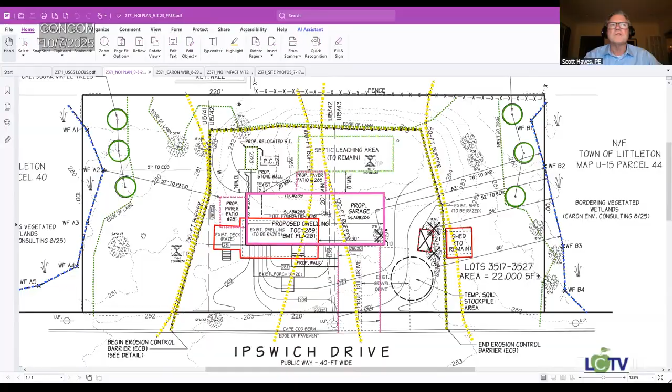So when we went out and did the survey, we picked up the edge of the lawn, and all the large overstory trees within the yard area have been identified. And we did our best to preserve as many of those as we could. Got a septic system up here, kind of in the middle between the two buffer zone areas, and the lawn kind of falls around here, and then down through here. It's the existing lawn, and then there's a lightly wooded non-lawn area between the edge of the BVW and the edge of the lawn. One of these trees over here on this side as well. So the site is about half an acre. It's largely developed almost to the full extent, with the exception of those small areas on the east and west sides.

What we're proposing to do is remove the existing house, construct a new house and a new driveway, utilize the existing septic system, and relocate the existing septic tank slightly. Currently the septic tank is right here. We're just moving it slightly in the same general area to meet the code offset to the foundation wall in the back, and regrading the lot a little bit.

We've got a very high water table out here, so we really had to pick up the house quite a bit just to keep it out of the water table and keep things dry. We're at about 18 to 24 inches here, and through all the test holes through the site the water table is pretty consistently at about 24 inches from existing grade. So we're kind of at a hard deck there for a basement floor level. Fortunately, this is a ranch type house. It's only a single story, so we'll elevate the slab a bit and not really create a mountainous house, because it's only a single story with a shallow gable.

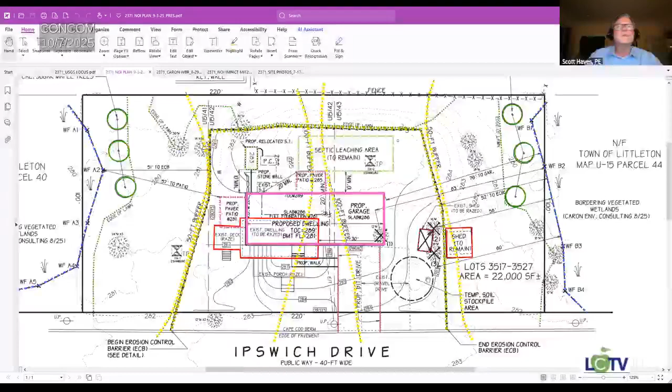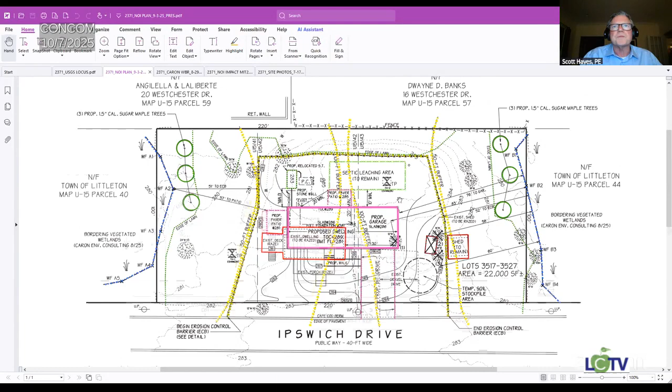I should also note, within the buffer zone, there's 3 trees that are proposed to be removed. They're beyond the 50-foot zone, but within the 100. They're all right in this area here: a 12-inch maple, a 14-inch maple, and a 16-inch maple here. So these 3 trees are proposed to be removed, and we've proposed to plant 6 sugar maples on the perimeter of the yard area as mitigation. We've got 3 proposed in this general area along the edge of the lawn, and 3 on the eastern side, just inside the lawn area, just to beef up those buffers. That's what we're proposing to do, and I'm happy to answer your questions.

Scott, do you happen to have any photos of the existing dwelling or any overlays of it? I do. Oh, lovely.

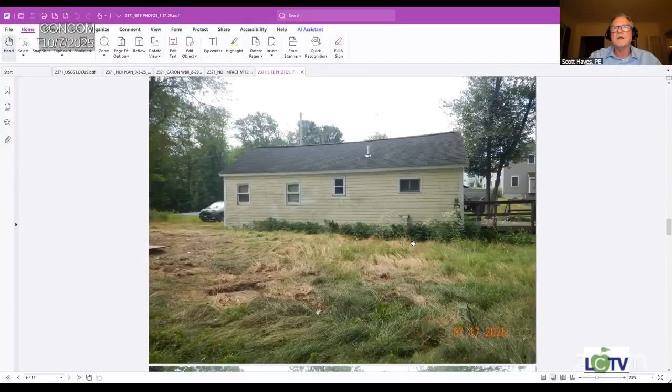This is the rear of the house. The rear of the house again. There's a manhole cover there, I think that's for the D box. The septic tank is over here. They put boards over the D box; they had a Title V done for the property sale. Haven't mowed the lawn in a while.

Why are you taking the trees out? Yeah, that's where I was going. Take the shed, sure, the garage, whatever you want to call it. But why do you feel a need to take the trees down, those two and the other one by the driveway? Well, the other one's in the building footprint. I understood the first one. These two then. Yeah, the first one is in the building. You don't want to have a tree going up through your living room.

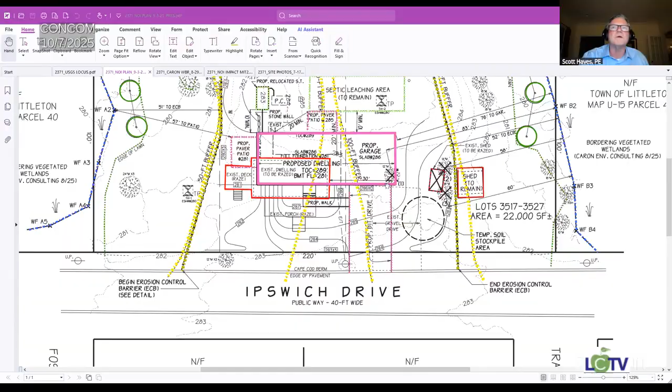But the other two trees, they don't seem to be doing anyone any harm. Our client asked that we remove them. He was going to remove the shed, and he asked that those be removed too. The way the site grading worked out, it lands right on the periphery of the work. Other than being in close proximity to the shed and the building, they look fairly healthy.

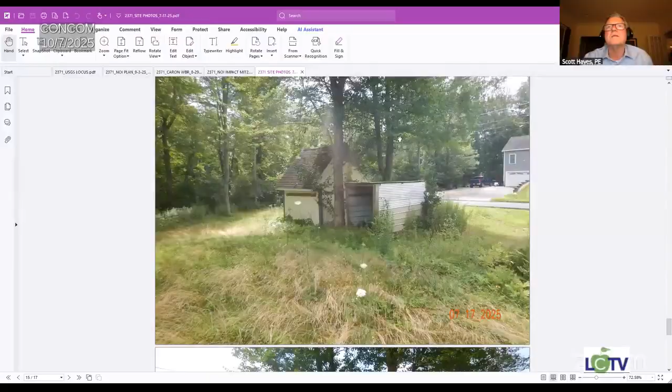Get back to the photos. I would agree with the discussion. I'd try and keep those trees if possible. Remove the shed, leave the trees. They appear to be in good health. I'm not an arborist, but they have decent canopy, and they're not blocking access to the quote unquote good shed. Well, no. Basically, excuse me.

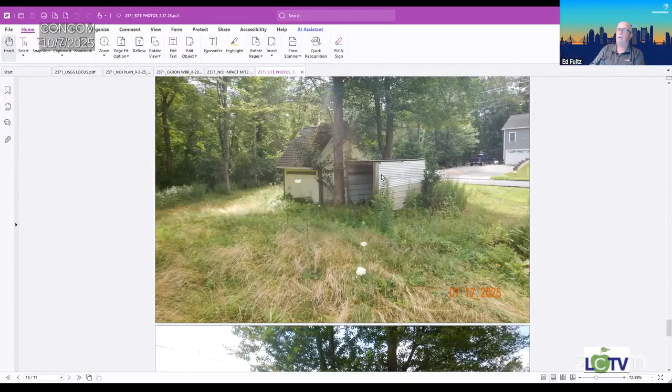So we've got the erosion control line coming up right to the face of the existing shed there. We could bring that erosion control line up around the trees. It's not necessary to remove them for construction, and I wouldn't say that they were a hazard. Really, I'm going to say just leave them. Did you say that new house was going to be on a slab? It is. It's a slab, but it will be.

There is a basement. We're basically setting the slab at about 1 foot above the water table, and we're building up an 8-foot wall from there, and then a single story. So there's a small basement. A lot of the footprint is slab on grade: the garage, a portion of the rear elevation of the house is slab on grade, and it's about, I think, maybe 600 square feet. See on the site plan, it shows those lines.

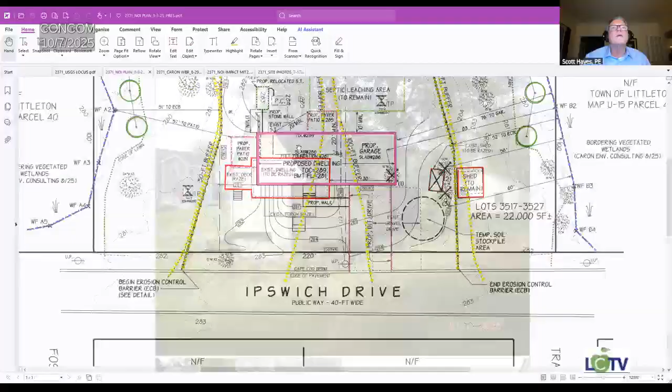So the proposed is in pink here. This dotted line is slab on grade. And the proposed garage on the right-hand side, that dotted line, that's slab on grade. So there's a full foundation at the lowest point of existing grade on the lot, which is kind of on the left-hand side here. So they get a small basement, I think maybe 500 square feet, just to get some basic services, water heaters, storage kind of stuff in the basement.

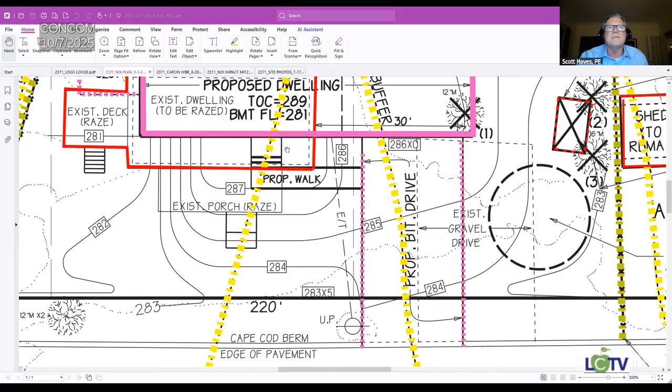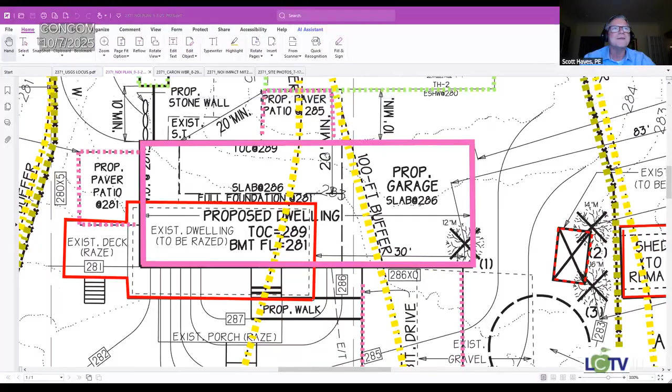Does the current house have a basement also? It has a crawl space. It's not much of a house. It's basically one of those surviving camps that has evolved over time. It's in very bad shape structurally. It's not something that can be rehabilitated, unfortunately.

But you did bring up a point just now. It's a surviving camp building, if you will, and you're proposing to put a real house here with all of the real activity that goes with a real house. Well, that's been used as a real house for years. Okay.

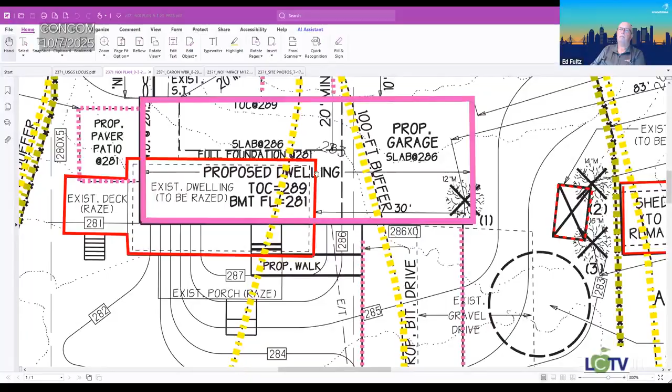Interesting. And Scott, did you have any other photos that you wanted to share with us before we dive in? Yeah, let's see what else we've got. You sound like someone excited to show something. Well, I took them in July. Yeah, back when it was still raining once in a while.

So this is looking back toward Ipswich Drive, and this is the structurally sound shed that they want to keep. And there's those two trees we were just discussing, and you see the house off in the distance here. This is the left-hand side, all cleared, unmowed lawn up to a tree line over here. And that's the last one. Thank you. That's actually very helpful to get a glimpse of what we're looking at here.

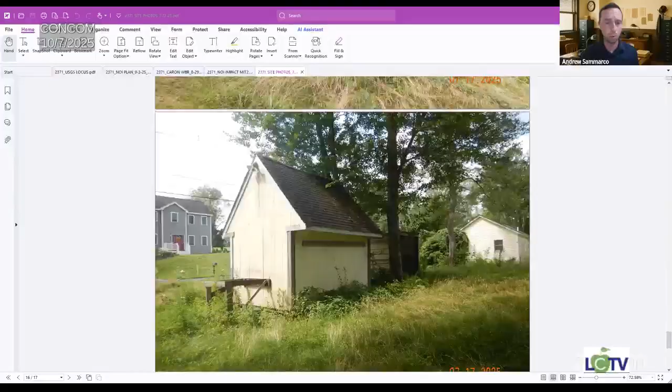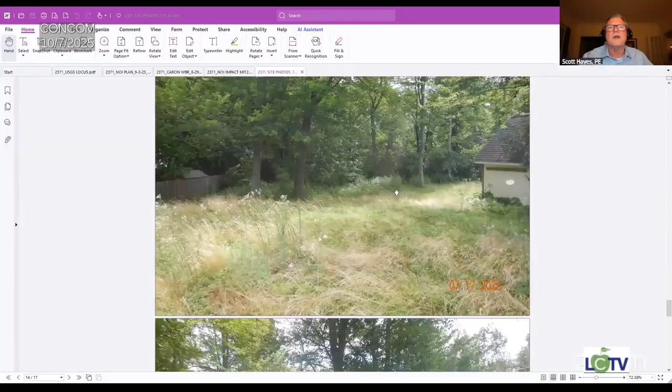Does the board have any questions or comments for Scott? Are there any drainage issues we need to think about on this that would drain into the 50-foot? We're not really changing the drainage characteristics of the site. We're elevating it a little bit in the area of the dwelling, but the site currently drains to the east and to the west, to the lower sides on either side of the dwelling. We're picking up 2 or maybe 3 feet of grade at the front of the building.

So we'll elevate the grade here, and then in the back of the house we're going to match that. It's already been elevated at the rear of the building for the septic system that was replaced 10 or 12 years ago. So we're matching that rear yard grade and bringing it forward, and then it'll slope slightly down toward the street. But everything generally drains and swales left and right, east and west, toward the wetlands. We don't have a tremendous amount of grade here, so things move slowly. It's not really high erosion potential or high runoff potential.

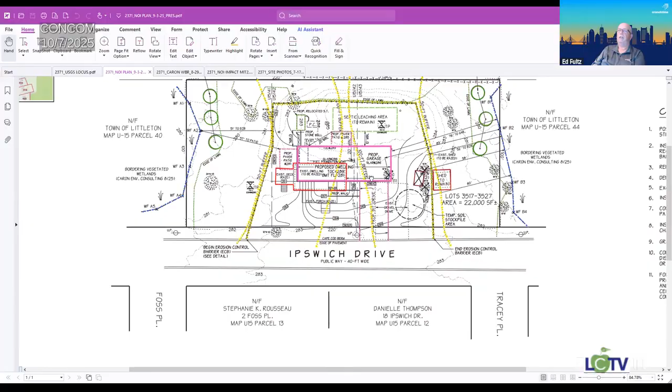So it's going to be difficult. It won't be difficult to say you can't use it. It'll be difficult to enforce it though. Right. And it's still within the... It's not. Still another 50 feet before it gets to the BVW. Except I think they're putting a lawn all the way out to it. Well, there's a lawn already.

Yeah. You've got to look on the bright side here. There's a lot of nice large trees that are being maintained and preserved and not altered. So we really tried to crunch the footprint to stay out of the 50 foot and also to preserve a lot of those nice large trees. And you scored two more tonight. We appreciate that. And the neighbors will be happy to have the eyesore gone. Yeah, I don't have a problem with it. It's all outside the 50.

Scott, I'm sorry, Ed. Go ahead. No, go ahead. Oh, I was just going to ask, is the existing system being removed, and then the new system put essentially in that same vicinity? I know it's really tight back there. No, that's staying. The existing leach field is to remain, and the only thing we need to do is relocate the septic tank at the rear of the building slightly to fit the footprint there. Gotcha. The leach field has an approved capacity, and they're limited to that, and we're not touching the septic system.

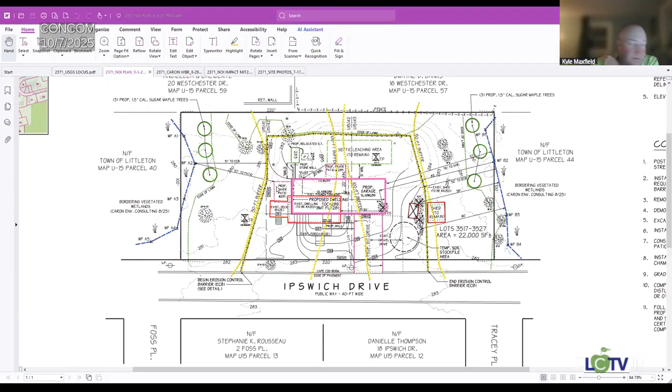I guess 2 feet is deep enough for a septic tank? Well, the grade climbs back there, so that septic tank and pump chamber are in fill associated with the leach field that was built before. So those are already elevated. We're at 280, 283, 284. So we got water at 2. What was water at the test pit? If you could read my tiny little script there, water's at 280. I guess one of my worries, depending on when this is constructed, it wouldn't be that difficult to tap into that water and all of a sudden have a flooded site that you're working in.

Well, the deepest thing going in the ground is a septic tank, and your basement. The basement's at 281, right? Yeah, so it's a foot above estimated seasonal high water. I mean, that's basically how I started the design of the site. I looked at the water table. I'm like, we don't want to fight that.

So can we build this up and have it work from an engineering design point, and have it not look bad and work for the site. And I think we achieve that. Excellent. Does the board have any other question or comment for Scott before we move on?

I do have one other quick question because I always forget what this is, but when it comes to impervious area and increasing, what's the percentage before stormwater calculations become required? I know Chase is usually the one that knows that number. Yeah. And I'm hoping that that's not the case here. I don't think it is, but that might be something that we should check.

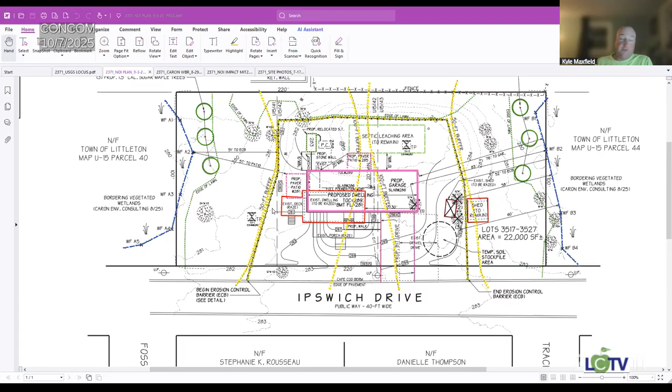Even though we are, I think we would want kind of a second row of erosion controls around the base of that stockpile, Scott. We don't typically—we usually are required to move stockpile material outside of the 100-foot on any other projects. And I get that that's not really feasible here, but because of that, I think it requires some added control mechanisms. So even if it's kind of just a backwards C around it, keeping everything up gradient, we're going to want to see additional controls. There is actually a small section there outside the 100 where it could be moved.

I just imagine that's where all of the access to the site is, that's where they're going to be going in. Well, yeah, there's that, there's the electric telecom service running through there, and a substantial amount—that's probably the most filled area. So like, how are you gonna stockpile land where you need to? The only reason I had that, that's no surprise, it's the only spot available.

I consider it a secondary erosion control, but the grade is, it's so flat there. It was right kind of near where the perimeter erosion control line was, so I didn't think we needed to do it. We can add in a secondary, down gradient. It's flat, but if it rains, like your soil pile is going to spread.

Yeah, I've seen it, I know. I've been around the block. Yeah, more than me, I'm sure. Yeah.

Well, see, sites like this, you don't worry as much because you don't have steep slopes, it's pretty flat out here, so water doesn't get away from you too bad. So it's the steep grades that get you. When those get stripped of soil, those can turn into problems real quick.

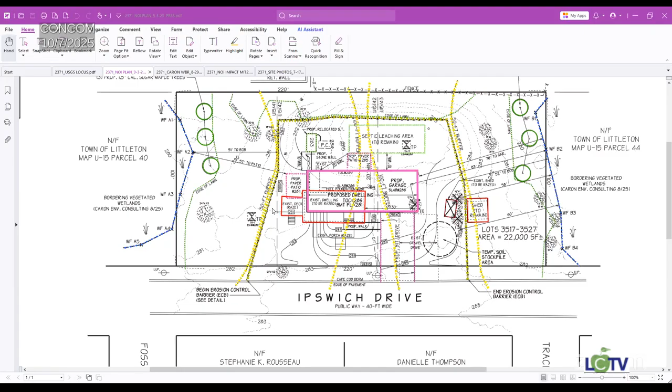So a delineation typically has to be redone every 3 years. The wetlands and resource areas do move around—it's probably not the best terminology, but they do change and evolve over time. In terms of wetlands on your side, you would need to get that delineated to get a true sense of where, if any, where any boundaries would be. So a document from 10 years ago might accurately describe conditions on the ground, and then again, it might not. Wetlands shrink and expand due to site conditions.

I just want to make sure that the restraints or the conditions you're putting on this building are correct for the land. So if you've done a recent survey and you do consider it wetlands, that's great, I just wanted to make sure that was accurate.

Absolutely, and as a part of this notice of intent, Scott and his firm did have to have a wetland scientist go out and actually delineate the wetlands, so we should have a pretty solid bearing in terms of where those are out there. Scott, can you speak to that a little bit, where these are connected and where things flow?

Well, it's not our wheelhouse at Foresight Engineering, but we work with Caron Environmental Consulting a lot, Chuck Caron, so we contacted Chuck to come out and inspect the site for the presence of wetlands because it looked suspect to us when we did a walkthrough. He came out and identified, by soils and vegetation, wetland resource areas on the east and west of the site, as shown in blue here. In his report, Chuck is very thorough.

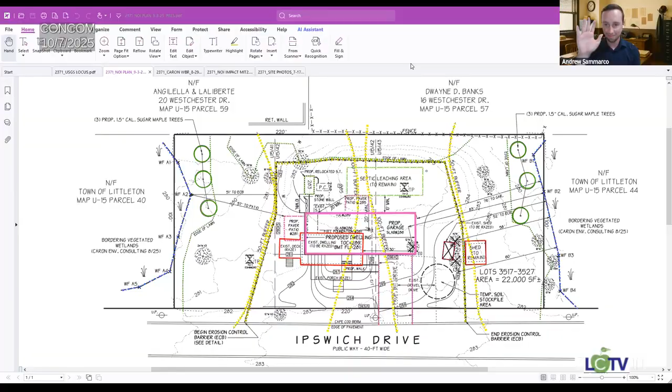Perfect, all right, we're running a little behind schedule, but we'll go ahead and open up our 8 p.m. continued public hearing — Notice of Intent, 87 Tahattawan Road, DEP file number 204-1027, construction of a two-family residence. Is there anybody here to speak to this project?

Brian Marchetti here with McCarty Engineering. Good evening. I couldn't see, but there may be a Carolyn Reed as well. Yes, we do have a Carolyn Reed in the audience. If you could allow her in, I'd appreciate that.

Hello, good evening. So, if I may begin — absolutely. My name is Brian Marchetti with McCarty Engineering. Here tonight as well is Carolyn Reed, she's the Executive Director of Habitat for Humanity, North Central Massachusetts. A little history on this — I was on the board of directors for Habitat for Humanity myself for 10 years. My term just expired, so now as a civil engineer, we're helping Habitat out now with their engineering for properties moving forward.

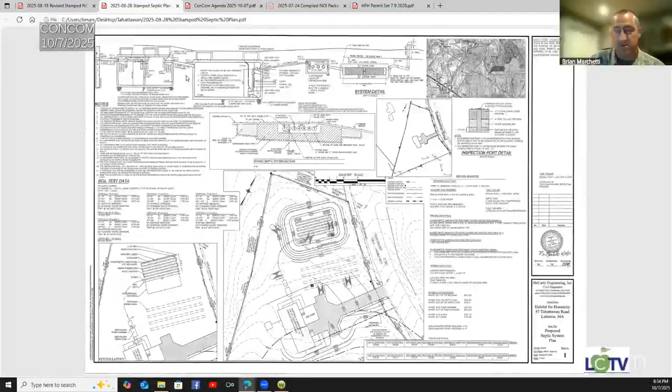You see between the grading of the septic system and the driveway, we've got a sizable area. However, this is the approved septic plan, so this is where the reserve area required by Title V is going to fit. Keeping the reserve in consideration, we moved the house as far forward as possible to meet the required setback to the septic, for the house as well as the driveway, as far north as possible, so we wouldn't take over the area required for a septic reserve in the future if the septic system ever did fail.

So that's what's reflected here on the plan that we filed with conservation. We are as far north as possible, as close to the street as possible, in order to fit the development, which again is a duplex development. We've got a 3-bedroom on the south side and a 2-bedroom on this side with a carport.

They both have accessible ramps long enough to get to the finished floor, first floor elevation from the driveways. Again, these are Habitat for Humanity homes, so they need to be designed to the latest stretch code, and they need to be designed to be accessible and meet all the ADA accessible standards required by the state.

As part of the project, these wetlands were delineated back in June by Three Oaks Environmental. The 50-foot buffer zone here, we've maintained all development outside of the 50. To fit the house, we have 5-to-1 grading on the south side here, which zooming in the plan, this is the extent of our grading.

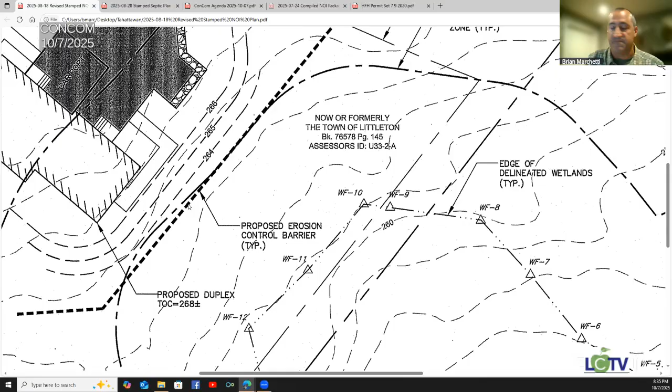I did show 5 feet off of our limited disturbance an erosion control barrier, which is a straw wattle silt fence line. We do show over here the detail for the wattle silt fence. So we're maintaining all the development outside of the 50, although I do show a piece of the silt fence here within the 50, but no development will be taking place within that 50-foot buffer zone.

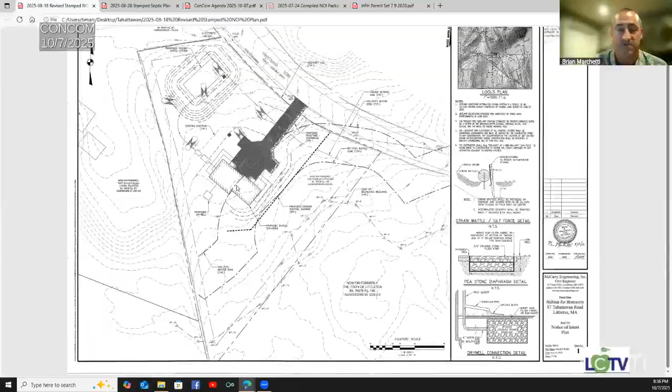For stormwater, there's a total increase on the entire property of about 5,900 square feet, which equates to 8.6% on the overall property, which is a little over 1.5 acres in size. However, within the buffer zone, it's 1,900 square feet, which equates to only 2.7%. But we are still proposing a pea stone diaphragm here along the south edge of the driveway.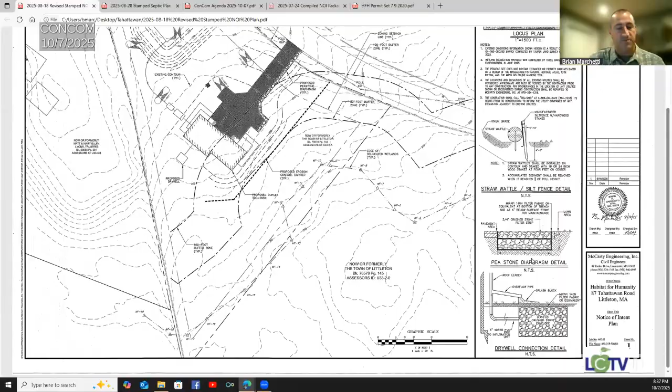So that's along the entire edge of the driveway, as well as a dry well in the backyard, which is basically a 9x10 crushed stone envelope, which we show over here in the details, sized to handle the half-inch water quality volume, which meets or exceeds what's required by DEP in the state as well. As you know, DEP doesn't require stormwater management for single family or multifamily developments of 5 or fewer units, but we're still providing that in order to provide a half-inch water quality volume for stormwater here on site.

Again, we're being served by an on-site septic system. Water is available within Tahattawan Road, so we'll be connecting with the municipal water service. The exact location in Tahattawan wasn't identified, however it was verified with DPW, it's in the street. So again, wherever that water service connects, whether it's within the 100-foot buffer zone or outside, it's all within our limit of impact and limit of disturbance here. There won't be any additional impact beyond what you see here on the plan.

So I think, Carolyn, unless you have anything to add, that's basically the presentation of what we're proposing here.

And if the board has any questions, we'd be happy to answer. Thank you, Brian. All right. One quick question for you, Brian. The area across the street, were there any resource areas identified or any buffer zones that were identified in kind of scoping out the site? I do know it's right in back of the lake. No, there were not. Our wetland scientist did walk the roadway and she did not identify anything within 100 feet of basically our limit of disturbance. Thank you.

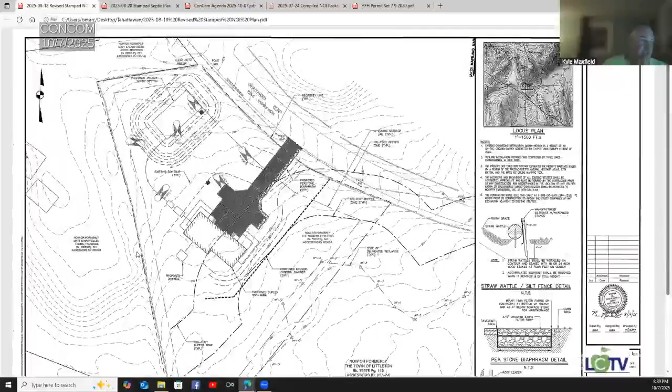I'll go next. Nobody else is going to jump in. I think it's the obvious one. If anybody looked at the aerial, this looks like a completely wooded site to me. Yeah, and if you heard anything we just talked about with our last hearing, we are really trying to avoid clear cutting all these properties that we have in town, at least to what we can control, right? And I totally appreciate the purpose of the project and where you're coming from on that side. We still have an interest to look out for in our town as well.

Yep. So can you describe what the existing vegetation area comprises of? I mean, it's a wooded site. I don't have a breakdown of exactly what's out there for vegetation. Do you have a plan for the trees you're going to cut down and how you'll remediate them? We do not. Basically, what's required here for the septic system, if I can draw a line on the plan, what's to be left on the site is basically just what's south of this line.

And potentially what's here up in the front yard, we could have some area left for trees, and along the back here. So everything here within the septic system, between the septic system and the house, to facilitate grading, the force main in the house up to our erosion control line here would have to be cleared. So before we can move on this, we're going to have to see you identify all the trees on the property that are going to be removed by species and size.

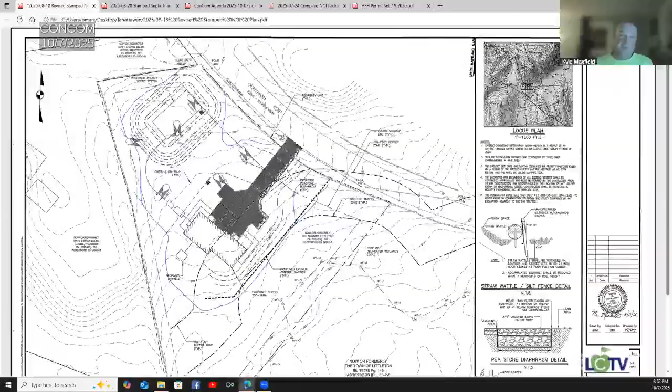So just in future, if you're working in town, we have no problem hearing your project beforehand as just a general discussion or public hearing. That way, if we have comments in the meantime, you can be working on those while we're waiting for the DEP number, and now we're not holding you up another 2 weeks, at least. Yep, understood. Thank you.

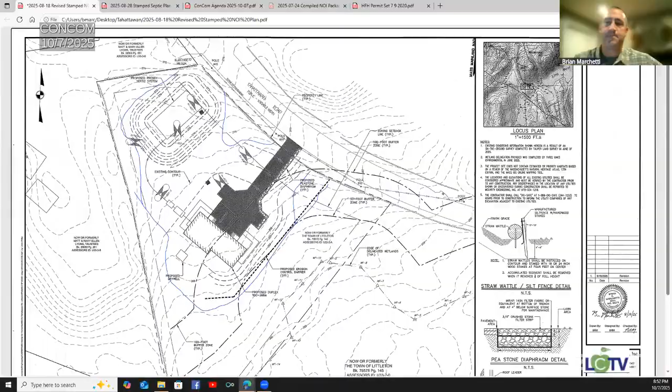Excellent. So we will go ahead and put you on for our next meeting, October 21st. Tim can confirm the time soon. But it sounds like we'll have the site walk next week, and we'll go from there. Okay, perfect. Thank you so much, and we'll see you in a couple weeks. Well, actually, we'll see you in 1 week, and then again in a couple weeks. All right, great. Thank you. Have a great night. Good night.

All right. We are running a little behind tonight. We'll jump into our 8:15 p.m. continued public hearing, notice of intent, 64 Beaverbrook Road, Lot 1, DEP file number 204-1018, construction of a shared driveway. Before we begin, Tim pointed out that I've missed two hearings for this project, so I will have to step aside for this hearing and the one following for Lot 3. Would somebody else be willing to run the hearing while I hide in the shadows?

Well, if no one else will, I guess I can do it. Thank you, Ed. All right, then opening the hearing for notice of intent, 64 Beaverbrook Road, Lot 1, DEP number 204-1018. Is there someone to speak to this? I believe you can open the next one also, since the time has passed, and they could be talking about them simultaneously. Sounds good to me. We're also opening the notice of intent, 64 Beaverbrook Road, Lot 3, DEP number 204-1019.

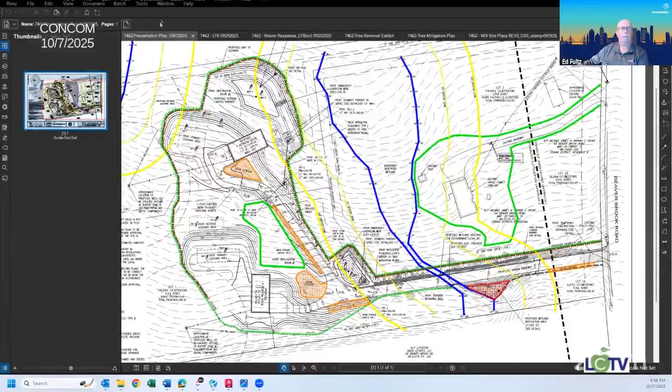Why don't we go one by one of the changes? One by one, great. So we've presented a summary letter, so that's dated September 29th. Specifically, we have enlarged and shown snow storage areas entirely outside the 100-foot buffer zone. They're substantial sizes and they're in appropriate locations to allow the stockpiling of the snow.

I'm going to switch screens on you quick. Those are the orange highlighted areas. And I'll give you an idea of the ratio on that. There's over 4,000 square feet of footprint of snow storage area. That's not cubic feet, so there'd be a substantial area to pile the snow here.

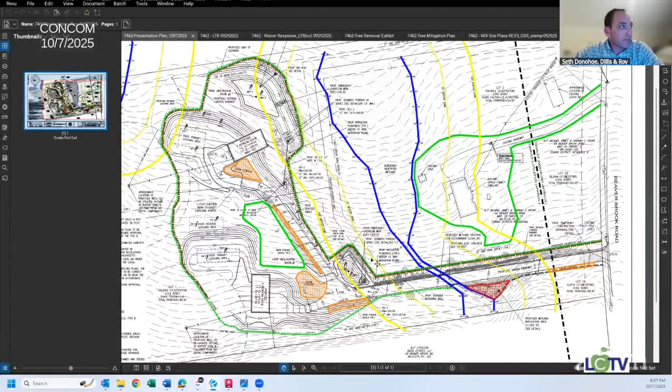The driveway that's associated with this plowing is just under 10,000 square feet before you get to the individual driveways. So this is about a 50% ratio of the surface area, which is sufficient for storing snow for most of our storm events. I'm going to switch back to the letter briefly. We've supplemented some tree removal details and tree removal exhibits. I think it'll be more appropriate to dive into that with those individual sheets, which I'll put on my screen shortly.

My understanding is that the commission has concerns regarding the utilization of fertilizer, particularly in lawn areas. And if there's a standard condition of the commission via an order of conditions to restrict or prohibit that use, I don't think there would be any objections to that. Certainly your prerogative, and I understand that that's consistent with other lawns located throughout town at this point.

Waiver request, we have submitted that, and I can get into that in more detail as we get to that specific page of the documents. We've provided a full waiver request letter that goes through documenting the compliance of the waiver reasons. Again, this is upland access to upland of the same owner, and this is the only place to access it on the property. And we're going through the skinniest portion of the resource area in this case.

I can get into a lot of detail on that, or perhaps it'll be more appropriate as we go through the plans. I think you guys may have some questions, or we may have some back and forth on a couple items. So if it's all right with the commission, I'll move to my next tab and get into some of the tree removal items. Yeah, that's fine.

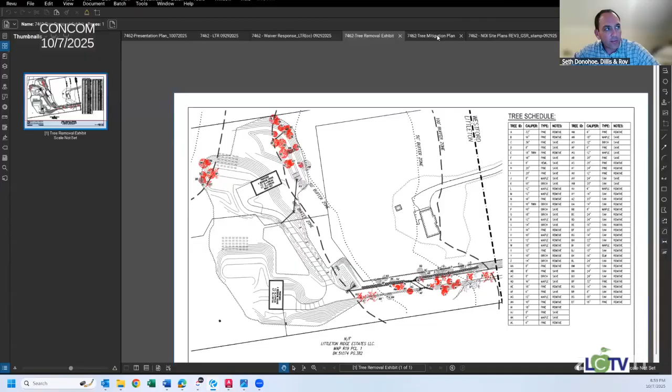Great. So we've prepared a tabulation of the trees that will be impacted by this driveway's construction. There's a full tabulation of the species and the caliper for these, and the tree removals are the actual red highlighted ones in this case. And that's also supplemented with a tree mitigation plan that's showing all of our buffer zone plantings in this case.

We have 6,821 square feet of buffer zone being enhanced through this plan that consists of planting of 30 trees and 60 shrubs. That does not count the wetland replication area. Again, that's a 3-to-1 wetland replication area. That's detailed on this plan, as well as the notice of intent plans that were submitted to you.

So our actual wetland impact to provide this crossing is limited to 306 square feet. We're exceeding the 3-to-1 ratio, going over 1,000 square feet of wetland replication, and that's within this low spot here. That's a mix of facultative, fac wet, and obligate plantings, as well as supplemental seed mix. Supplemental seed mix is also proposed throughout the planting area along the fringe of the property.

I will note, as I mentioned, I've been on the site several times. Some of the wooded areas are fairly sparse. There are some larger pine trees, but there's also some shrub vegetation that's frankly not doing that well. So overall, this will provide a significant improvement to the vegetative buffer at the site.

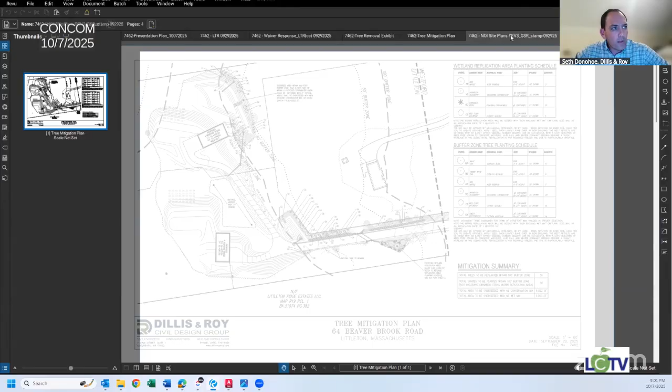We have the formal notice of intent plans. They've been revised to incorporate all of these details, typical construction details, as well as erosion and sedimentation control notes. This project, coinciding with this application, is also going through a stormwater review process. We've met the technical requirements of that. The project is in full compliance with DEP stormwater standards, so that'll be mitigating for all storm events up to and including the 100-year storm. And it also includes the required sediment removal within all the structures and the general performance standards that go along with those.

Those are the documents that have been resubmitted to the board. I'd be happy to address any questions at this time, and I can flip back to any particular screen that the commission finds would be helpful for this conversation. Commissioners, anyone have any comments, questions? Yes, no? It seems like that covers the things that we spoke about last. Yeah. Okay.

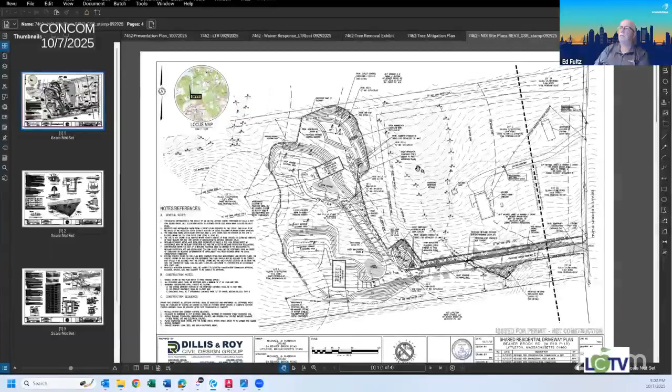So can you walk me through a little bit more of the reasoning, the justification of the waiver? So I guess what I'm taking out of it, what it says, a net environmental improvement. Some wetland replication, is that the net? Yeah, absolutely. Well, there's two sides to that. So in your waiver requirements, one of them is very specific in that it says to avoid a take, and that would mean a regulatory taking, where in this case, these are A&R lots, and the site would not have another means to access this. So by that stance, the regulations would essentially preclude the value of those lots.

That's something that DEP recognized in the Wetlands Protection Act and normally raises to a limited project. And that would be triggered when we do more than 5,000 square feet of wetland alteration. That's not the case here. We're well below that at 300 feet and change here. So we don't rise to the limited project threshold in this case. Certainly, it could qualify as a limited project on the local level if it was to say that they could not access their upland. That aside, I feel that we've done a very good job of documenting what's there and providing improvements, and this will be a direct answer to your question.

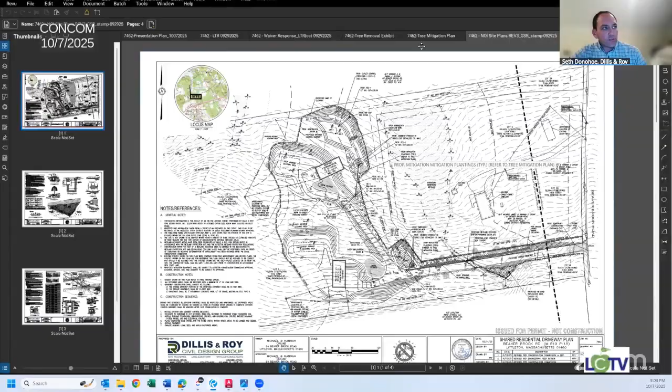I'm going to switch to the tree mitigation plan that was prepared. It's an extensive area paralleling the entirety of the development area, and these are all native species that are specified throughout here: white oak, swamp white oak, red maple, high bush blueberry, red osier dogwood, sweet pepper bush, as well as New England wetland plant seed mix throughout the area. As somebody that's been on the site a couple times, it is a very, I call it bland woods. There's some larger white pines that are probably coming to the end of their life at this point. There's some understory birch that frankly look like they may have transported themselves when the abutting property was developed many years ago. So this will provide an enhanced buffer zone, essentially.

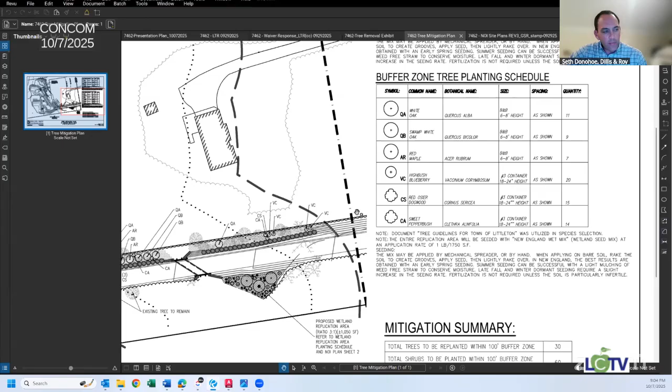We're going to have thicker native vegetation in the area, as well as an understory that's essentially lacking at the site at this point. And that's exceeding 16,000 square feet in planting area just for the buffer zone restoration plantings, which follow the entirety of the limit of the project area. A substantial portion of this project, actually 15% of the trees that are going to be removed in this case, are required to be removed for the stormwater management areas.

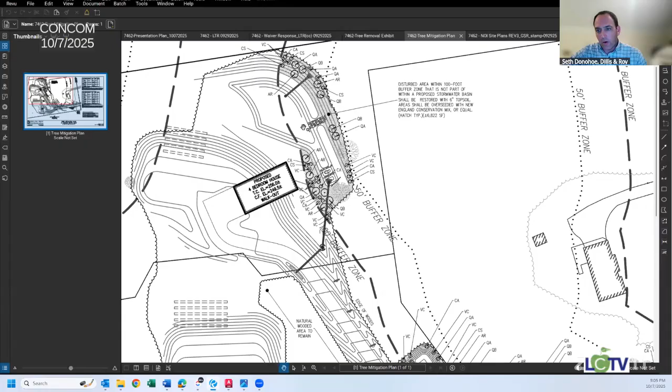So as the commission knows, the stormwater management thresholds would normally not be triggered by this project. DEP says it has to be 5 dwellings or more; 4 dwellings or less are exempt. The town has applied that standard to lesser developments. We take no objections to that. We've designed it in full compliance with that. But I want to point out that some of these alterations are a byproduct of reaching that level of compliance as well. So that is also incorporated in our mitigation as well.

One of the things to note with the wetland itself, it's essentially a scoured channel within an area that's tributary from an adjacent stormwater outfall. And that area is subject to eroding. So in this case, we're proposing a 3-sided culvert with precast wing walls. It'll provide for some permanent stabilization. The channel itself is subject to erosion right now. That'll be remedied by putting this in place as well. So between the actual construction activities that result in that stabilization and the extensive planting proposed, I feel that we've reached a level of compliance that on a personal level, I think it would be worth granting the waiver on this.

Thanks. I have a quick follow-up question just because you mentioned the tributary, the channel. So I'm all for stabilizing things and I understand how the wing walls work and that's part of that. Now, does this raise any concern of other scour? Are we increasing flows through there, or are flows high enough that scour is a concern with the new construction of this? So it's a great question.

It's been dry almost every time that I've been at the site, actually. It's sandy, gravelly material that's been transported. In addressing DEP's comments, it does have channelized flow, and therefore we have to meet stream crossing standards. And that's where this arose. Originally, it was proposed as a simple piped culvert. Now it's an open bottom culvert.

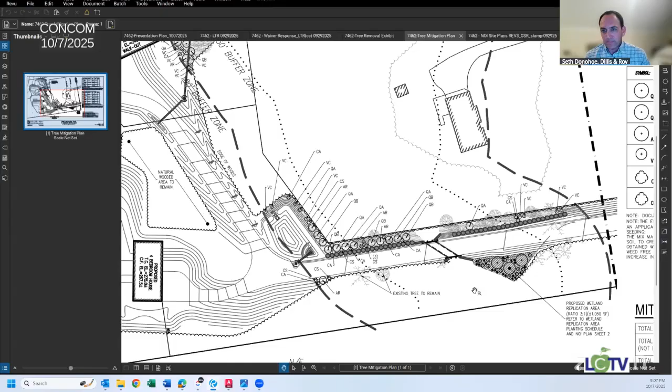All right, any other comments? Well, I'm still a little bit concerned with making the crossing to access additional lots. I'm just trying to make sure that we're consistent with how we make our evaluations. Because there have been other projects that have wanted stream crossings to access other building lots, and we haven't supported them. Are you asking for justification from me, or are you fielding a general question? General question.

So Carl, you're saying that this particular project, because of the stream crossing, and because it requires a waiver, it shouldn't move forward? I just want to make sure that we had the complete discussion, that we're being consistent in our determinations. So, Carl, I actually spoke with Amy last week about stream crossings in general and the history of those since the bylaw was enacted, and to her knowledge, none had been permitted since the bylaw was enacted. That's what I was thinking.